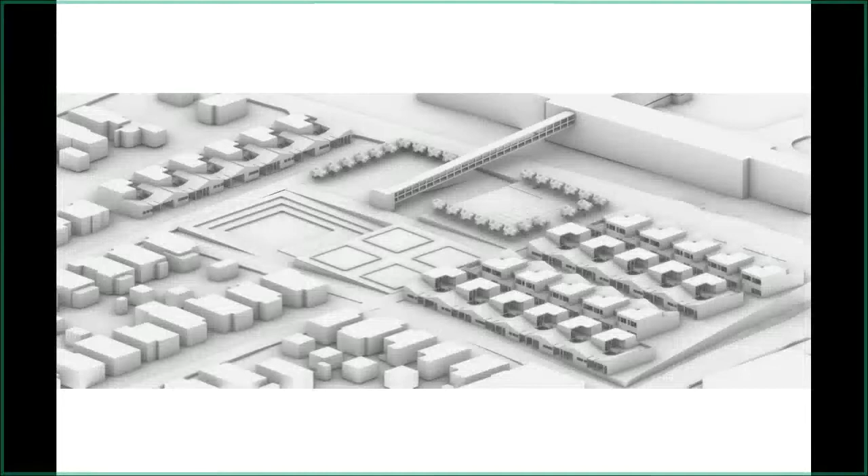We take it as common knowledge that water is necessary to sustain life, a fact integral to any and all aspects of biology, ecology, and society. Maslow's famous hierarchy of needs ranks such physiological needs ahead of safety and any psychological need or interpretation of self-fulfillment.

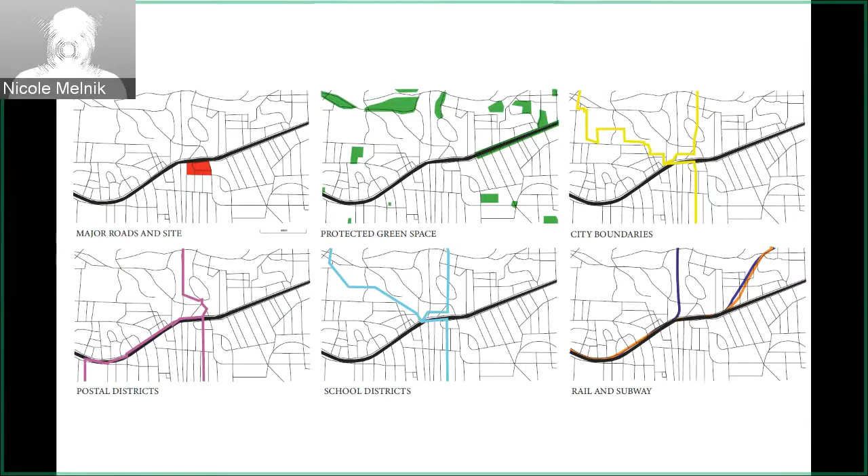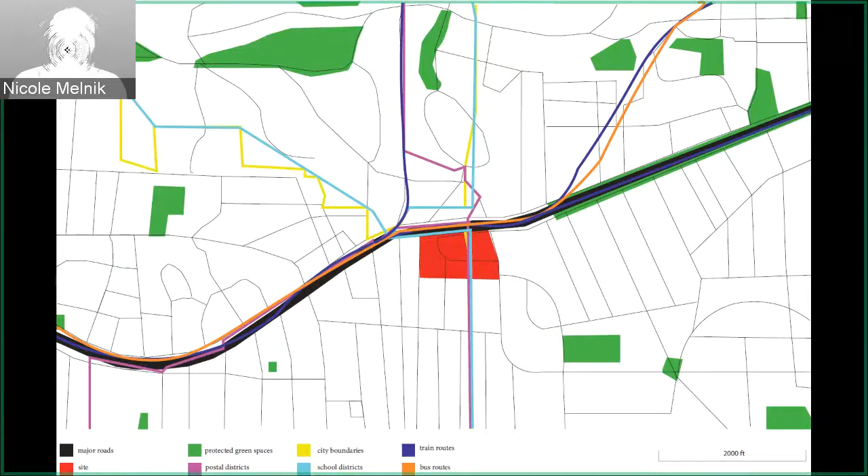Here I have documented diagrams depicting the major roads, green spaces, city boundaries, postal districts, school districts, and public transit lines in relation to the site, as well as their overlay. The site given to us proves to be the connection point of these systems, where they all intertwine, providing reasoning for the massing logic developed.

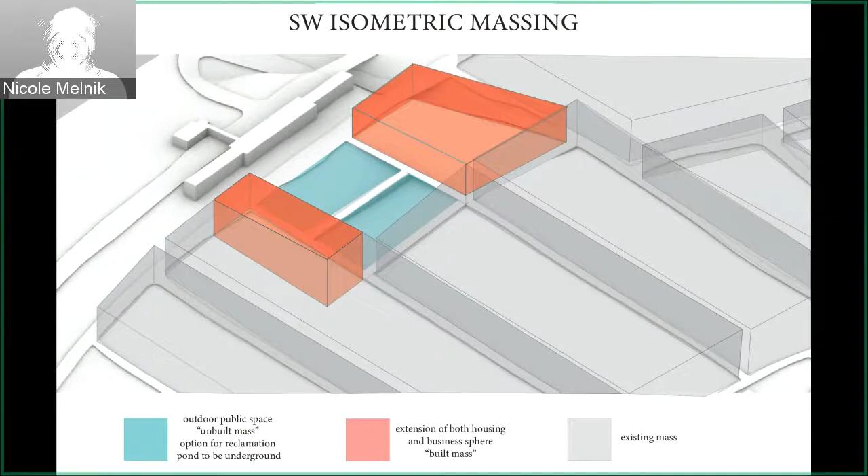This isometric massing diagram depicts the relationship of the public to private realm in relation to both one another as well as the existing mass. The public area lays where the connection of the aforementioned systems takes place, as a place for gathering of the neighborhood and community at large.

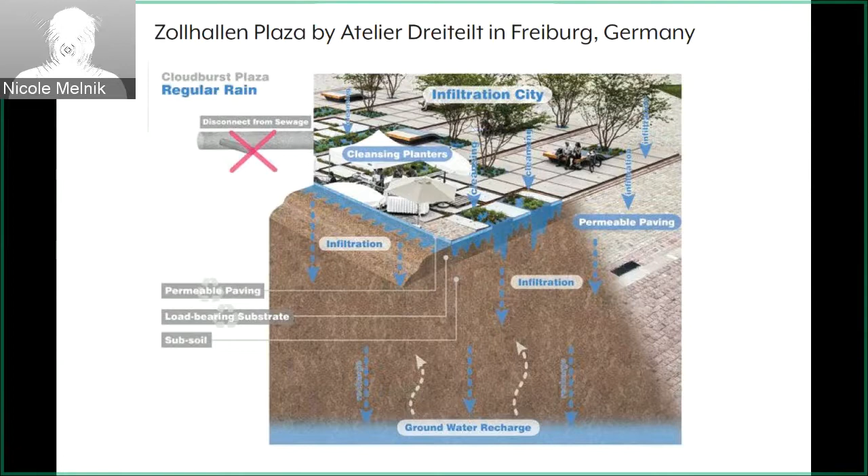Following the research of these systems, I began to explore the idea of conservation and reclamation of water within the public sphere. The Zollhallen Plaza in Germany proves most successful in using porous paving materials to both shape the public realm and act as a catalyst for reclamation, with thin, gutter-like systems resting in the cracks between concrete slabs. The riverkeeper community derives its own system of water reclamation from this precedent, used throughout half of the public sphere.

To give context to any further illustrations of the riverkeeper community, here is the neighborhood placed on the existing site, the south lot of the East Lake MARTA station. East Lake Drive, Leland Terrace, and Winter Avenue are all extended to College, restoring the existing urban fabric which was erased by the development of this station.

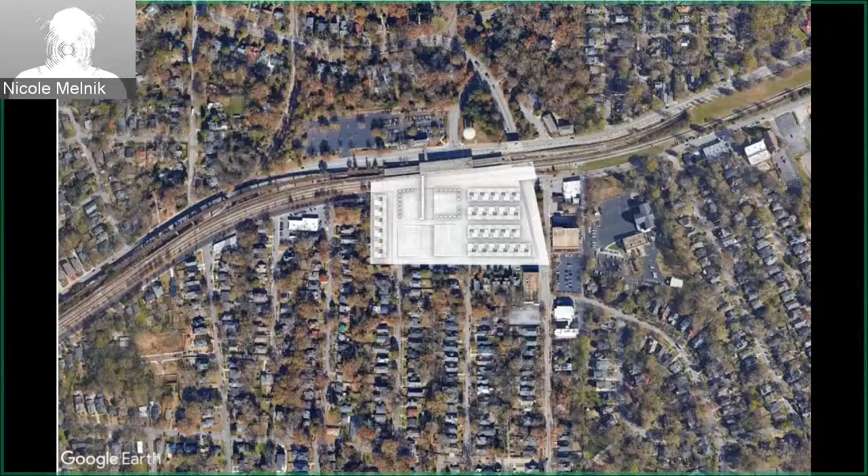Now, welcome to the riverkeeper community. The community is developed into two spheres as mentioned before, the public and private. The private exists in the form of individual units of housing on the east and west of the site, with the public sphere in the center.

The public sphere is then subdivided into four sections: open green space in the northwest, with the opportunity for playgrounds or expanded vegetation; a permeable concrete fabric in the northeast, with a large waterfall feature from the reclaimed gutter system that expands into the northwest; an outdoor amphitheater in the southwest; and a community garden in the southeast.

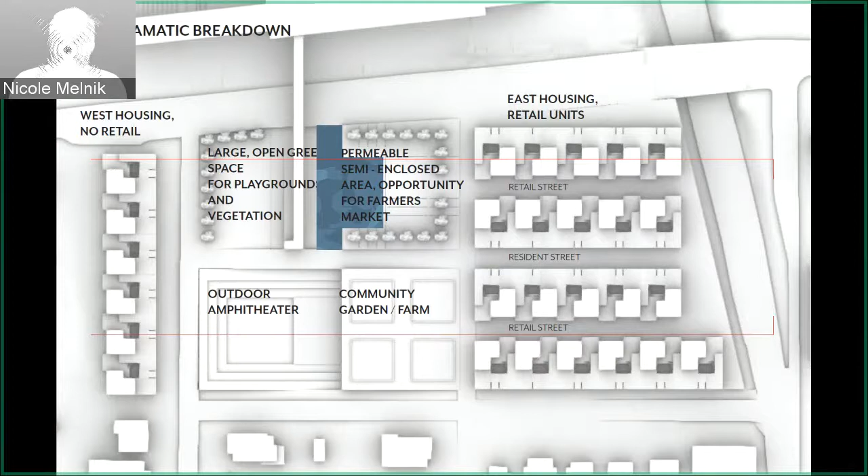Additionally, the housing on the east accommodates retail streets and resident-specific streets for shopping and home entry, respectively.

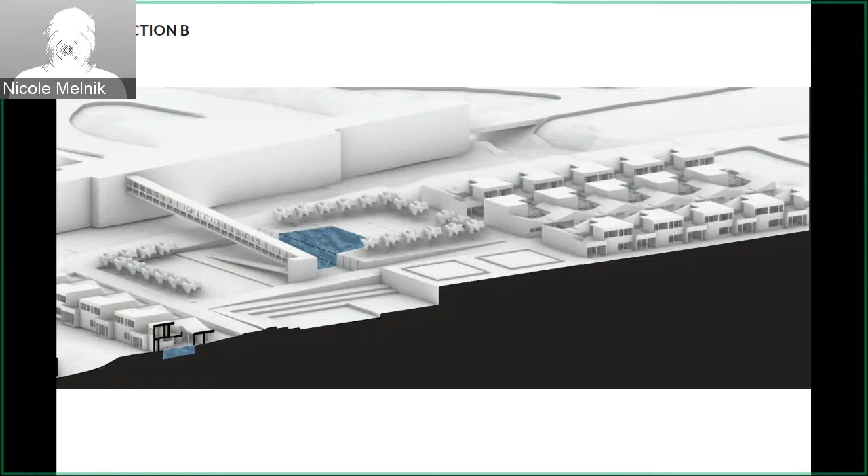Section B cuts through the outdoor amphitheater, community garden, and retail street of the east housing block, displaying the relationship of the MARTA station to the neighborhood, specifically the transparent bridge system that overlooks the entire site.

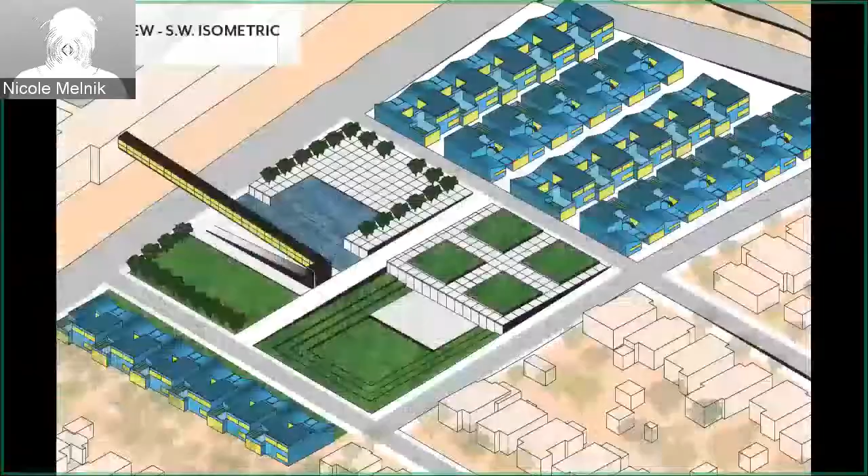This isometric massing diagrammatically shows the entirety of the site and the fluidity of different materials, walking systems, and linear relationships employed. Additionally, the permeable fabric system employed in the eastern half of the public realm is most visible here, with small, gutter-like crevices in between 10 by 10 foot slabs of concrete.

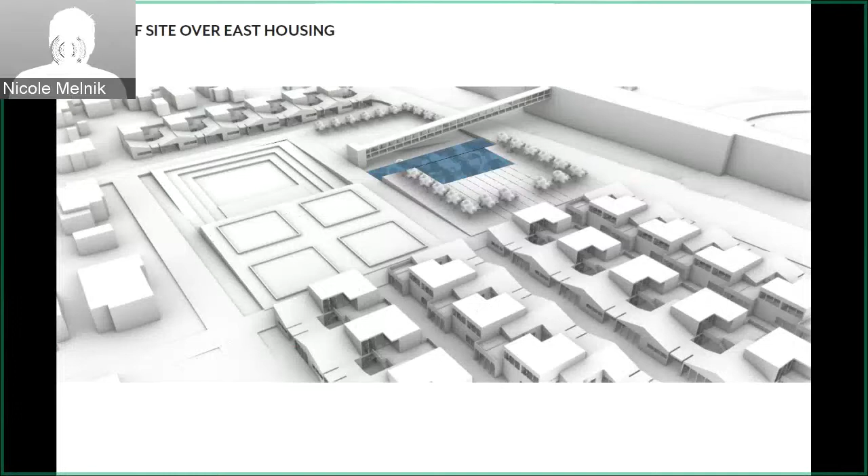Similar to the earlier site section B, this isometric perspectival image above the east housing block aims to show the majority of the site, specifically the relationship between the bridge connecting MARTA to the community. Again, one can see the expanse of the entire neighborhood on the descent down from public transit.

Now we focus on the individual unit. Each unit has 3 beds, 3 baths, an interior courtyard, rooftop balcony with garden, and retail space.

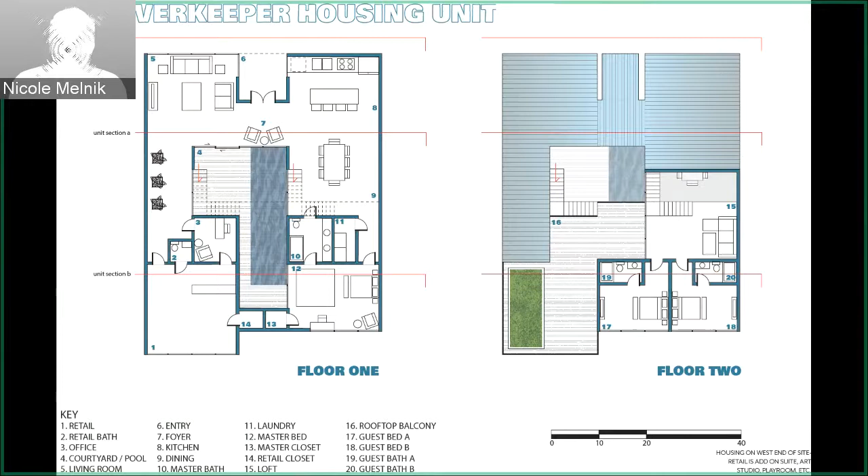In the courtyard, there are individual lap pools for the residents, with an entry both on the interior near the entry to the unit itself, and with a private entry and lounge space by the master bed. The pool aims to employ exercise through the medium of water and, of course, fun and beauty as well.

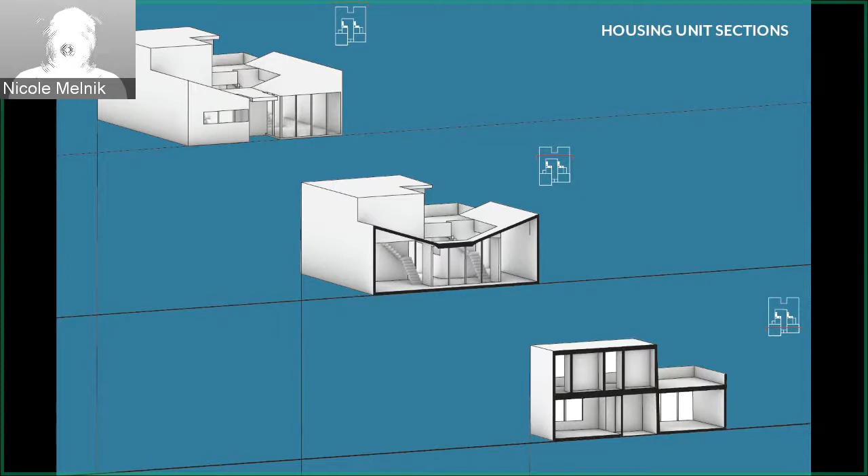Each unit inhabits a tilted roof system, which allows water to trickle down the windowed walls lining the resident entry as a medium for appreciation of the beauty and inherent qualities of water. This tilted roof system ultimately creates the texture of the fabric that is one of the defining characteristics of the neighborhood.

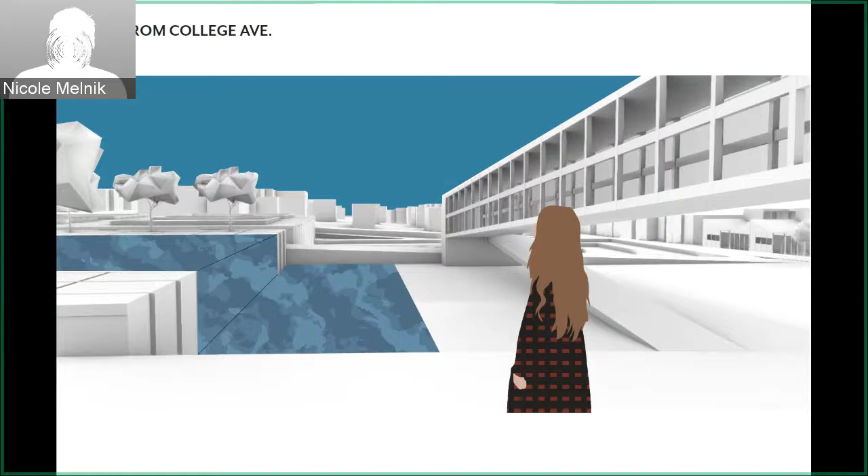This view from College Avenue onto the public realm of the site offers the greatest opportunity for visual enjoyment of the reclaimed waterfall feature, as well as the opportunity for choice, whether to head east and inhabit the permeable northeast quadrant, or to head west and inhabit the public green space.

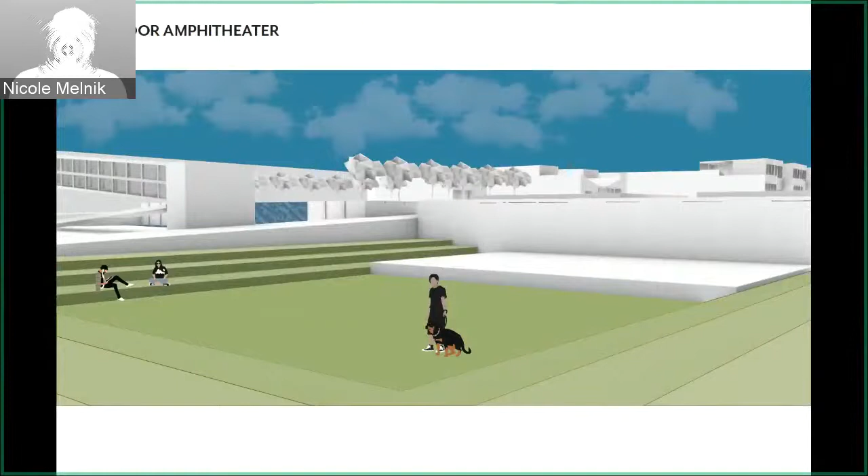The outdoor amphitheater provides opportunity for gathering, whether it be large scale, such as a concert or symposium, or a more intimate gathering of friends.

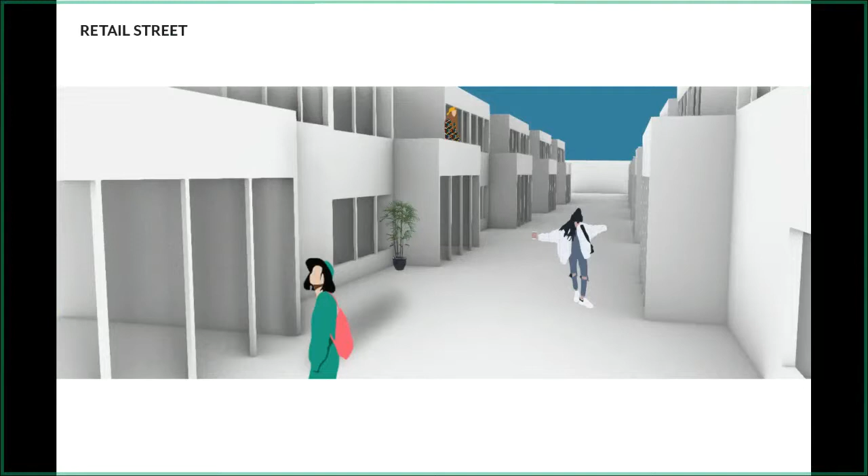The retail street is a 15 to 20 foot wide pedestrian street in which the shops inhabited by the housing units on the east are on display.

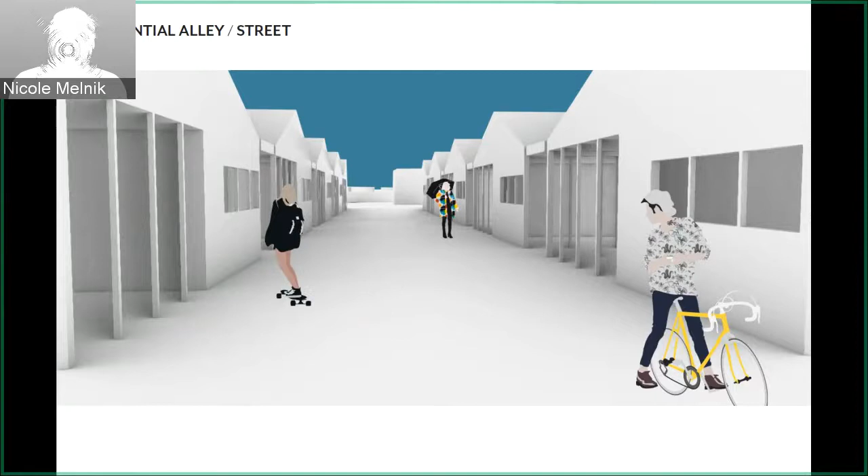The Riverkeeper community, a design with an emphasis on water, appreciation, exercise, and reclamation. I reiterate now the poem I emphasized at mid-review, by Ralph Waldo Emerson.

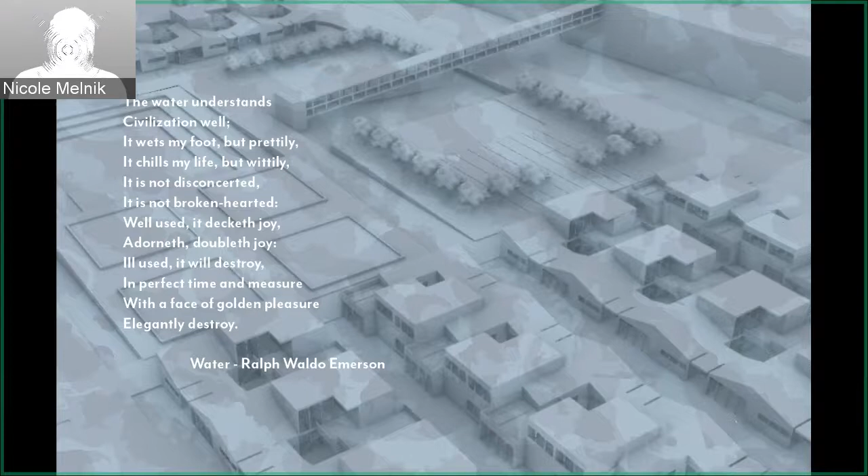The water understands civilization well. It wets my foot, but prettily. It chills my life, but wittily. It is not disconcerted. It is not broken-hearted. Well used, it decketh joy. Adorneth, doubleth joy. Ill used, it will destroy. In perfect time and measure, with a face of golden pleasure, elegantly destroy.